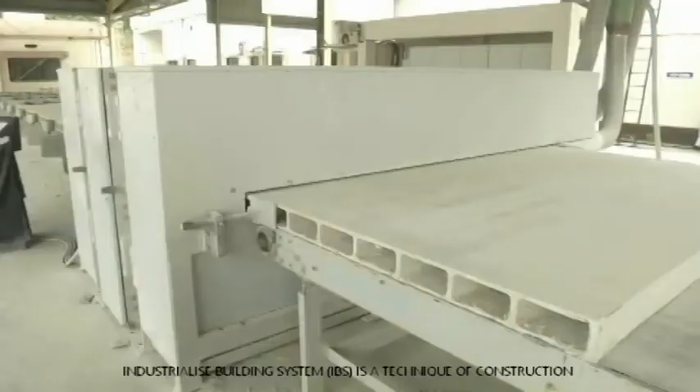Industrialized building system is a technique of construction whereby components are manufactured in a controlled environment, either at site or off-site, placed and assembled into construction work.

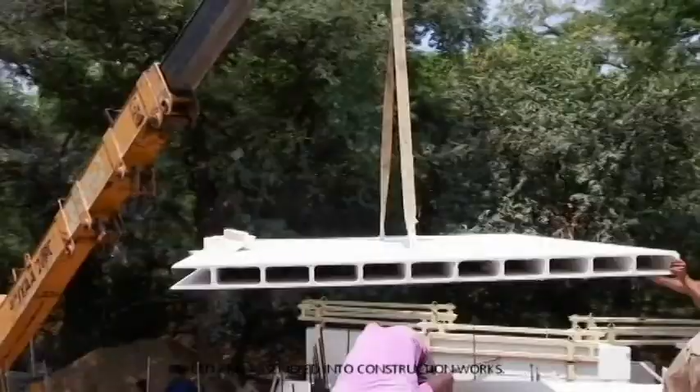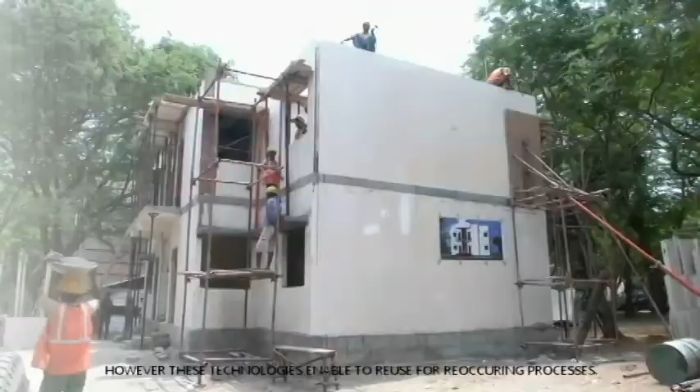The cost in technology transfer is due to the initial high cost in implementation. However, these technologies enable reuse for recurring processes. The government had started the first project on IBS, which aims to speed up the delivery time and build affordable and quality houses.

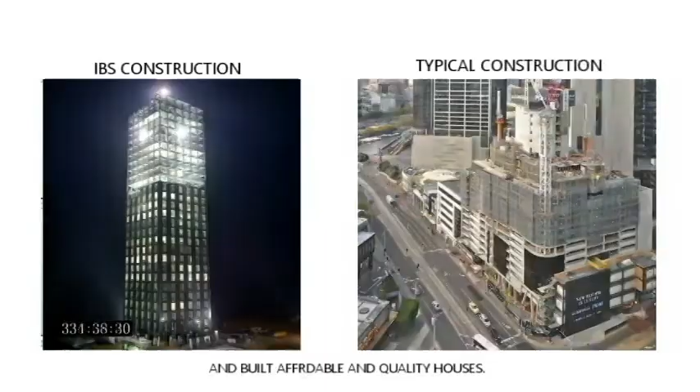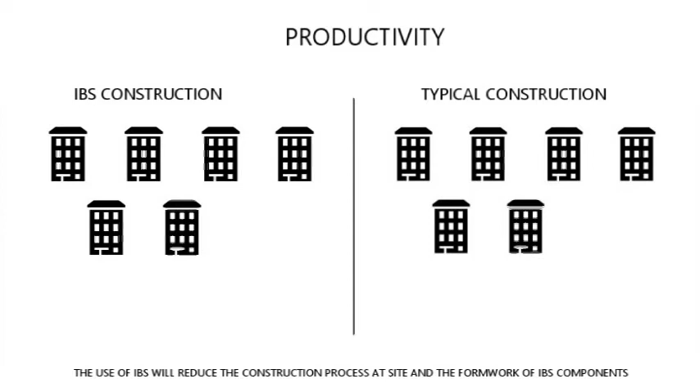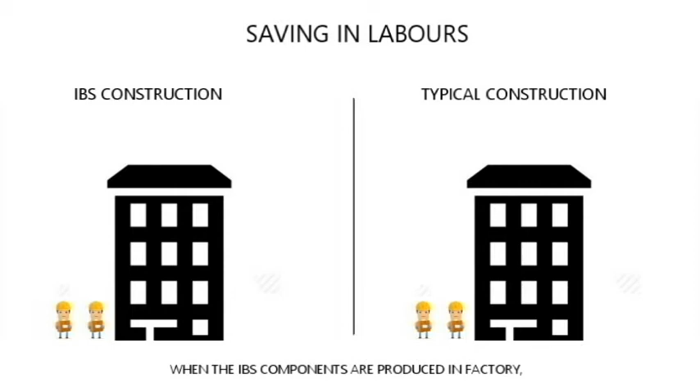Productivity. The use of IBS will reduce the construction process at site, and the formwork of IBS components allows for repetition of the elements, consequently increasing the productivity of the structure. Saving in labor. When the IBS components are produced in a factory, a higher degree of utilization of machines is permitted and the use of labor will be reduced, leading to savings in labor cost.

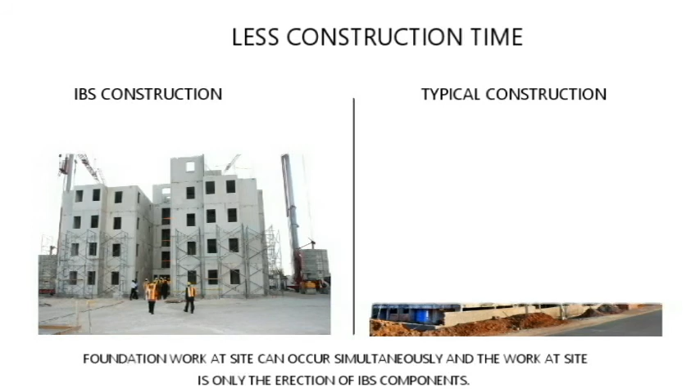Less construction time. IBS requires less construction time because casting of precast elements at the factory and foundation work at site can occur simultaneously, and the work at site is only the erection of IBS components. This leads to earlier occupation of the building.

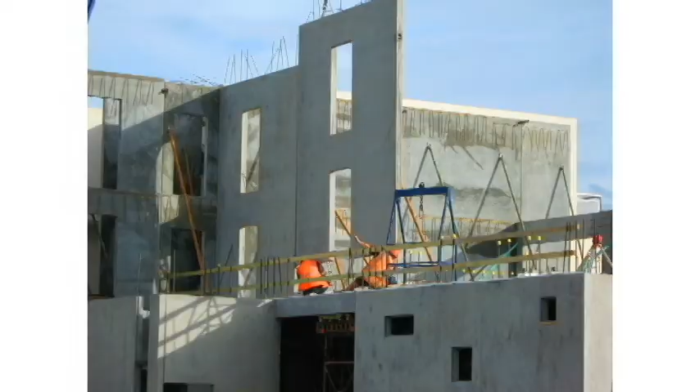Seri Mutiara apartment, which is located in Setia Alam, has a total of 676 units. The construction period has only taken 18 months to complete. The main precast components used are precast load-bearing walls, precast concrete staircases, and precast toilet pods. We will be using this information and apply it to our design apartment later on.

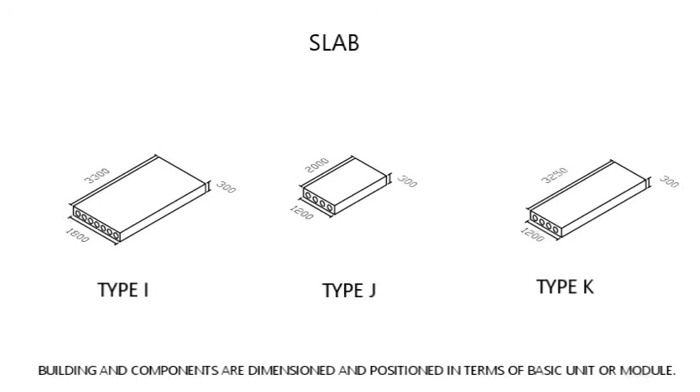Modular coordination is a concept of coordination of dimension and space, in which buildings and components are dimensioned and positioned in terms of a basic unit or module. It provides guidance to building component sizing, which can reduce the need to further trim and shape the materials to fit together in construction.

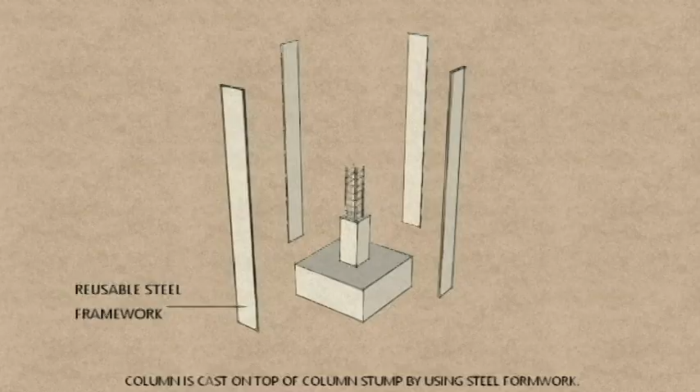Precast foundation. The soil located in between RC piles is first excavated to begin with the construction of the apartment. The ground leveling is aligned to ensure precast bed footings with protruding column stumps are in the correct position. The cast in situ column is then cast on top of the column stump by using steel formwork. The joint between column and foundation is secured due to the rebar in the core of the columns.

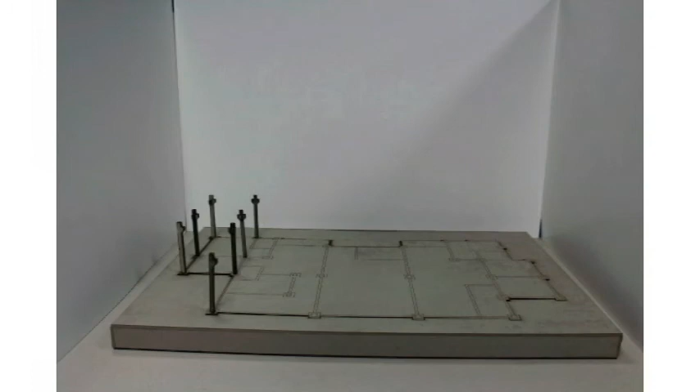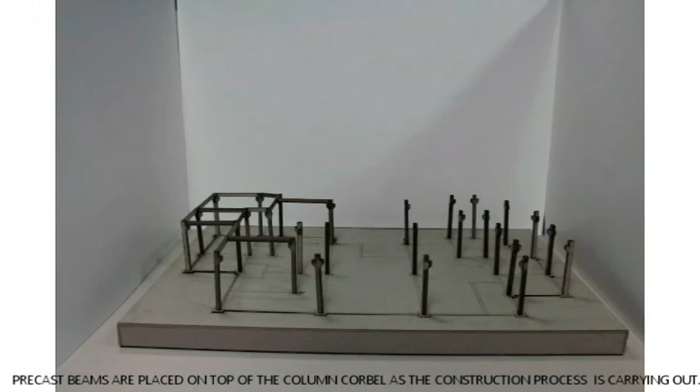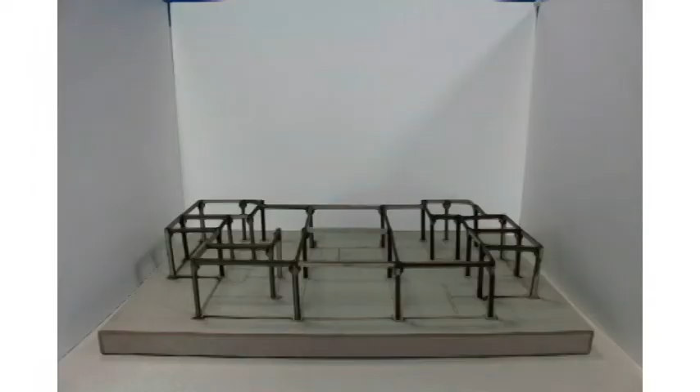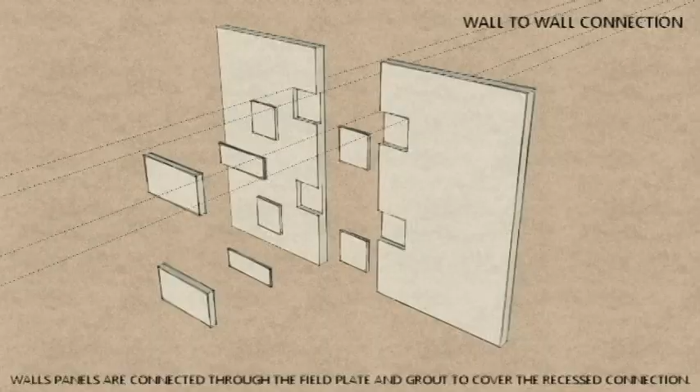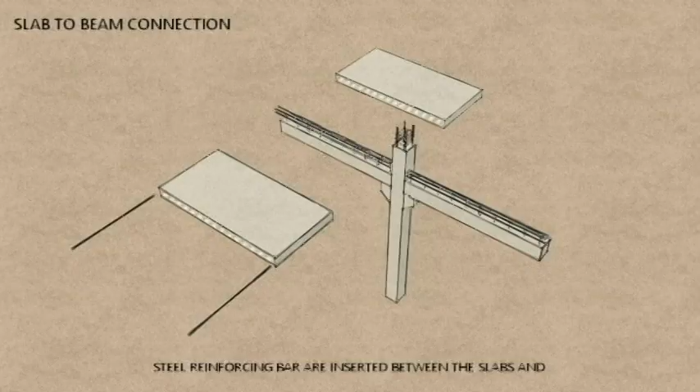Hollow core slab sits on top of the precast beam. Hollow core slab is preferred for the ease of ducting, as precast elements are not flexible for renovation later on. Steel reinforcing bars are inserted between the slabs and secure both of these components by grouting with cement. Connection between column and column is grouted with cement, which is the same as the column connected with the foundation.

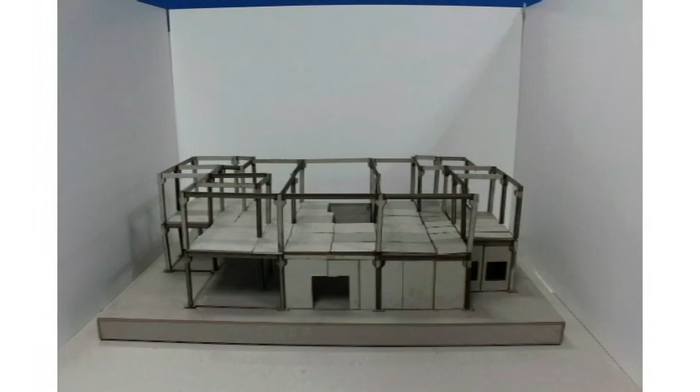As the precast lift core is a 3D component, it can be manufactured off-site in bespoke molds and installed quickly and efficiently on-site. Precast toilet pod. The compartment wall is first installed together with all the precast walls. The toilet pod is then slotted into it with a 100 mm reinforced concrete slab to prevent spillover.

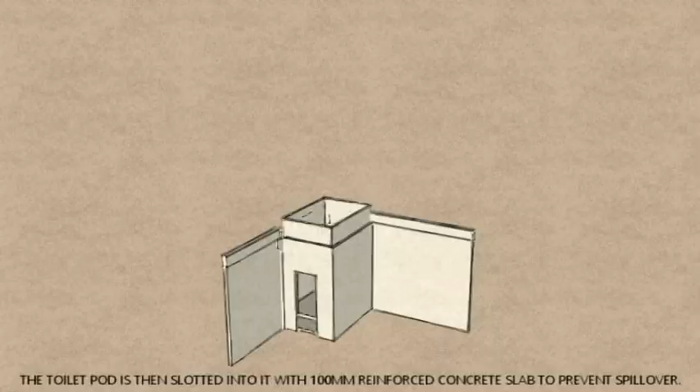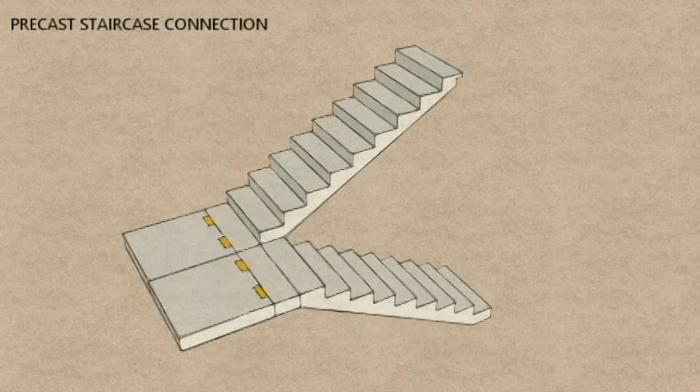Staircase with anchor plates is then slotted onto the landing. The gaps are grouted and secured with cement. The landing is connected to the precast wall through the L-angled plate connectors with bolts.

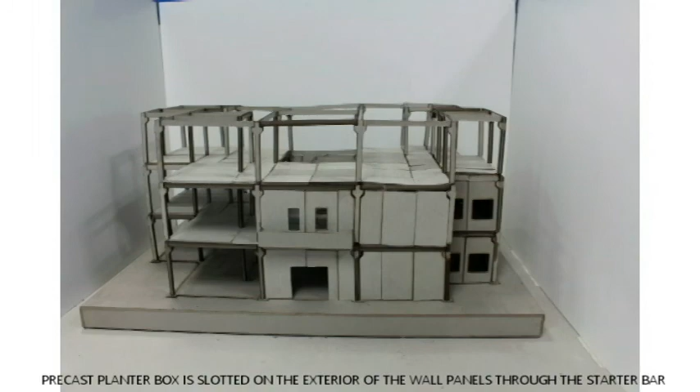Precast planter box is slotted on the exterior of the wall panels through the starter bar and grouted with cement to cover the gaps. The balcony slabs are designed with drainage to allow water runoff. The railing posts are inserted firmly into the balcony structure by the metal fixing plate. The whole component is then slotted into the beam.

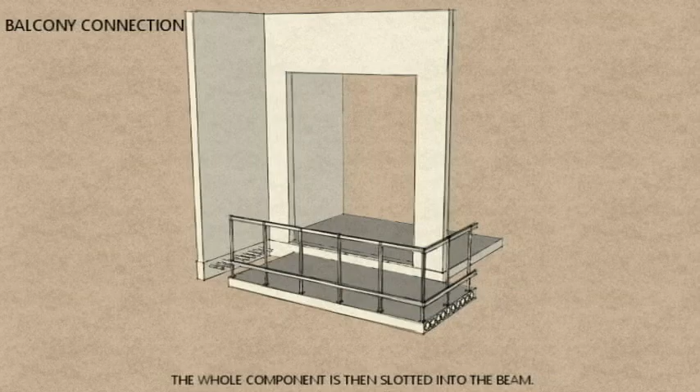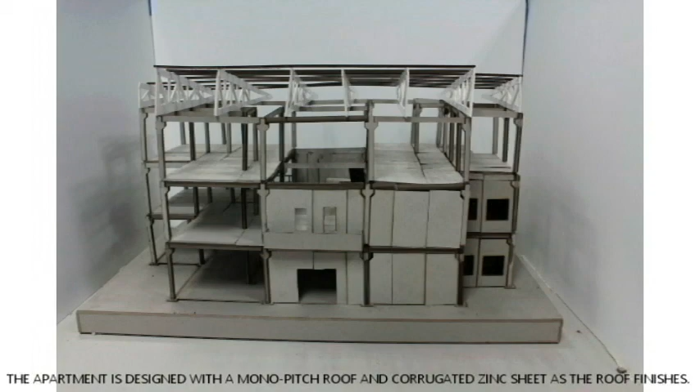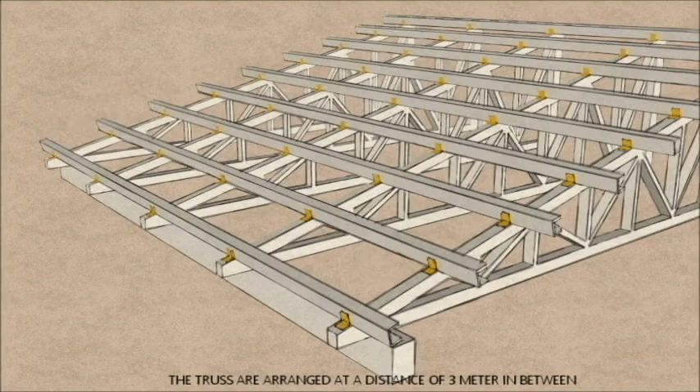The apartment is designed with a mono-pitch roof and corrugated zinc sheet as the roof finish. Prefabricated roof trusses are secured to the beams via L-plate connectors with bolts after the completion of the superstructure. The trusses are arranged at a distance of 3 meters in between, where C-channel purlins are bolted on the rafter with a distance of 1.8 meters.

A layer of netting is laid to hold the aluminium foil thermal insulator in its place. Pieces of corrugated zinc roof are screwed onto the purlins from the bottom up.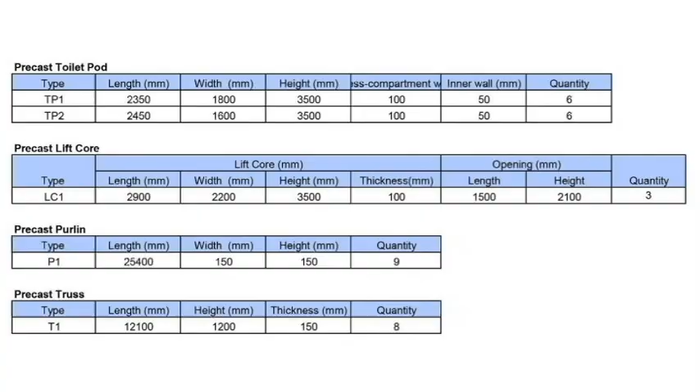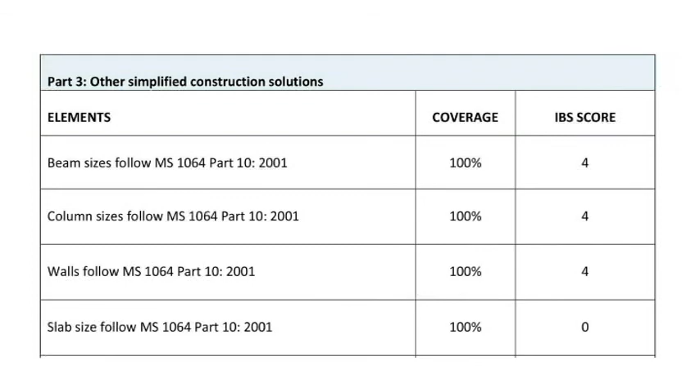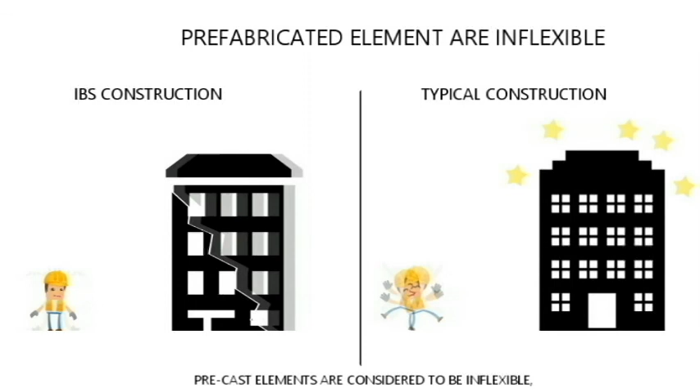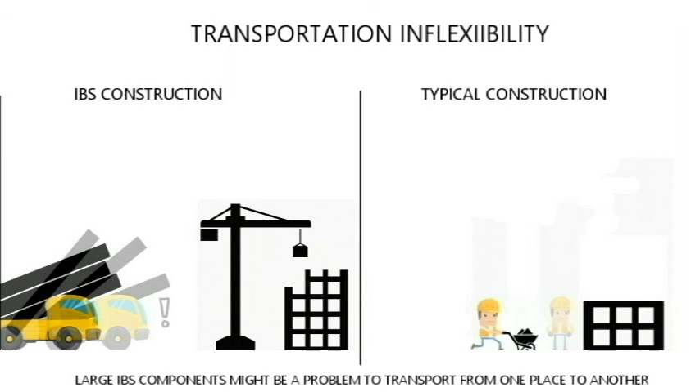Prefabricated elements are inflexible. Precast elements are considered to be inflexible with respect to renovations. It may affect the structural integrity of the building. Transportation inflexibility. Large IBS components might be a problem to transport from one place to another, and this will increase construction costs and transportation time.